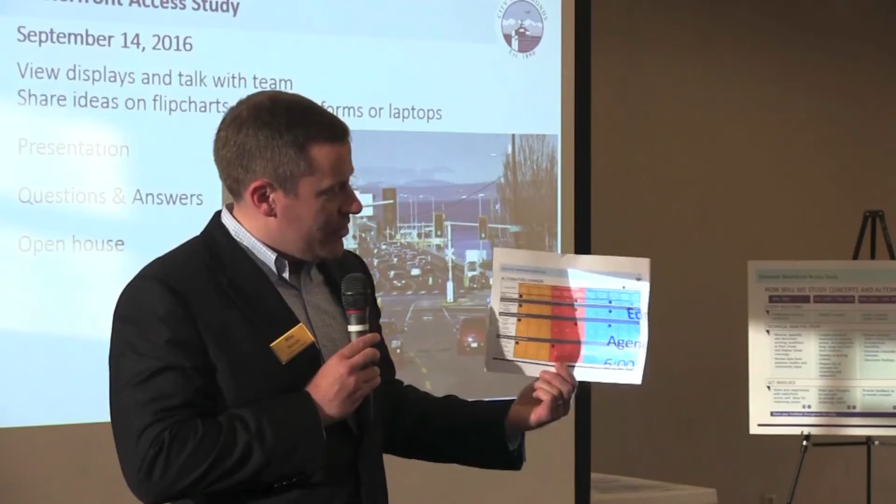Some of you already have this wonderful sheet, but if you walk away with anything tonight, take this with you and look at it. It's a little complicated, we'll walk you through it, but this will let you know where things have bubbled up and scored, and we'd like to know what you think about it. Do you like them? Do they need to be improved? Do you like one more than the other? Is there something we didn't consider? This is the last open public meeting for the task force, so this is a really great opportunity to have an impact before we make a recommendation to the mayor. With that, I'll turn it over to Rick.

Thank you. Thank you, Mike.

As Mike mentioned, this is the fourth meeting, and we have found the input from the prior three meetings very instructive. We've had a lot of participation between those who have attended in person, as well as those who have visited the site online. We've gotten a lot of nice comments out of it. I don't think we've had any real scolding comments, it's all been very, very constructive. So we're looking forward to more of that tonight.

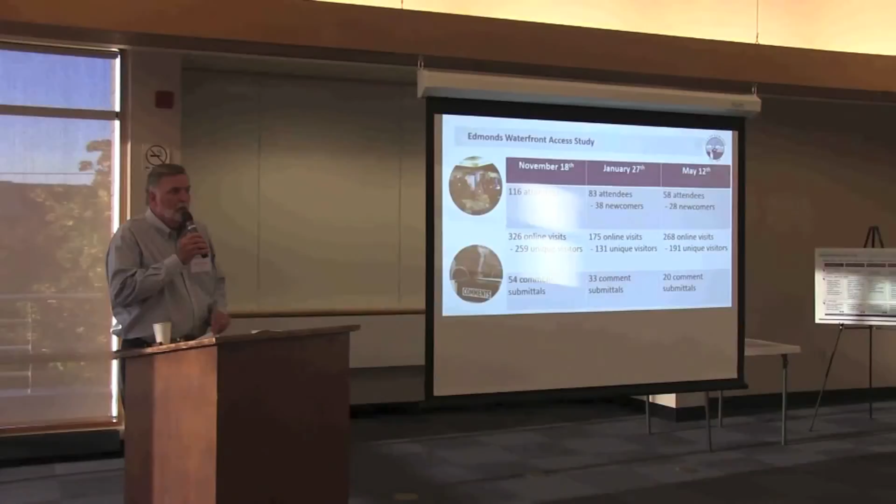So how this is going to work: we'll talk here for a little while, we'll have a question and answer session afterwards, and then you're free to look at things in greater detail, the displays, talk to me, talk to other project staff and the task force, and we'll learn something from you all.

As I mentioned, we've been through a bit of a process. This is our 4th meeting, but we've taken a number of ideas gathered from our team, from prior studies, from the community. We've screened through those in what we call level 1, and from there developed a series of alternatives. We've just gone through the detailed evaluation of those alternatives.

We want to have another meeting here with you all before the task force starts to formulate the recommendation. I want to emphasize, they very specifically decided we're not going to make a provisional recommendation. We want to air this out one more time before we go forward on this, so the iron's hot to strike.

So this is from early days. These are the myriad alternatives or solution concepts that were forwarded in level 1, that we went through and evaluated using a conceptual set of criteria, or qualitative set of criteria.

The idea is to come up with near-term and long-term solutions to address the 4 major needs set forth for this study: improving reliable emergency response access, providing for emergency evacuation of the waterfront when needed, reducing delays to the loading and unloading of ferries, and improving circulation and reducing delays and conflicts for all modes of transportation near the railroad crossings.

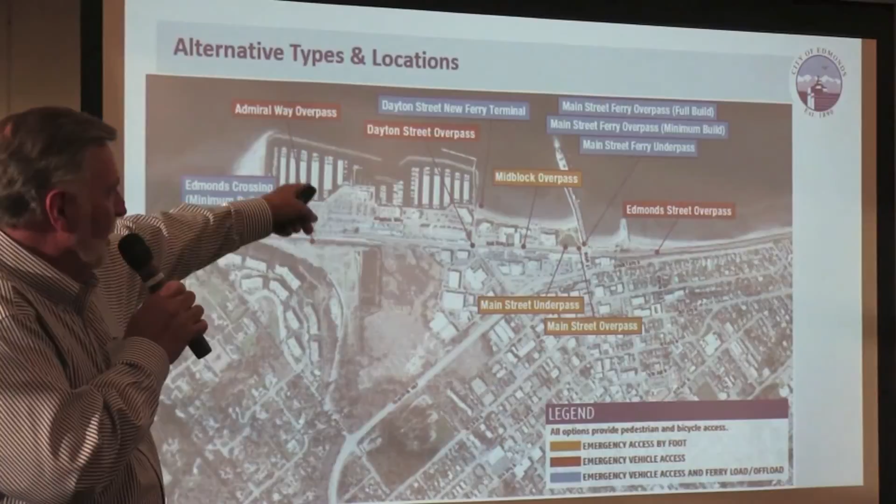We have things like the Edmonds Crossing. Those of you who have been here a while are aware of that. This is a scaled down version of it, but it would basically load cars and store cars over at the Unocal site and take them over to a new ferry dock sticking out basically off the south end of the marina. The Dayton Street New Ferry Terminal would build a garage in the Harbor Square area, and that would queue vehicles, and then they would go over a trestle to the north of the fishing pier, and that would be a new terminal as well.

And then we have 3 alternatives that would modify the existing ferry terminal: one is an underpass, and then 2 different scales of overpasses. Again, there are details on each of these, with a list of the major pluses and minuses as we've identified them in the evaluation.

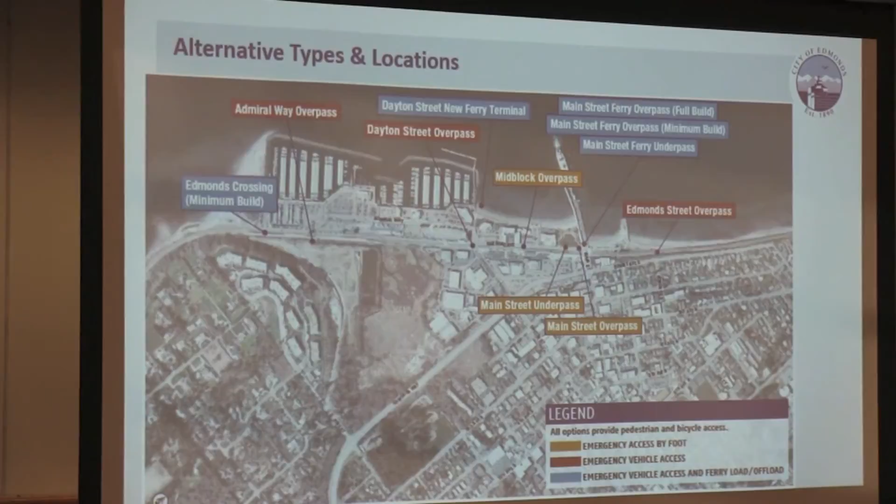In the evaluation, we had 11 criteria that were developed, and we discussed this at our last meeting in different areas. Some of these have up to 9 subparts. The task force has gone through and evaluated each of the alternatives using these criteria, given them a score, and documented the reasoning behind it.

Copies of those are available to view in the room here afterwards—we have notebooks with those. This is kind of the result of it all right now, as it stands, where we're at. We applied a numerical ranking for each of these criteria, 0 through 5: 0 if it's fatally flawed, 5 if it does a great job of enhancing the functionality or benefit.

Using those 11 criteria, not all evenly weighted the same, we've got check marks here identifying which ones came out as highest rated among the different types of alternatives. So what we have is the mid-block overpass came out as the best rated alternative among the pedestrian overpasses. For emergency vehicle access, the Edmonds Street overpass came out with the best score.

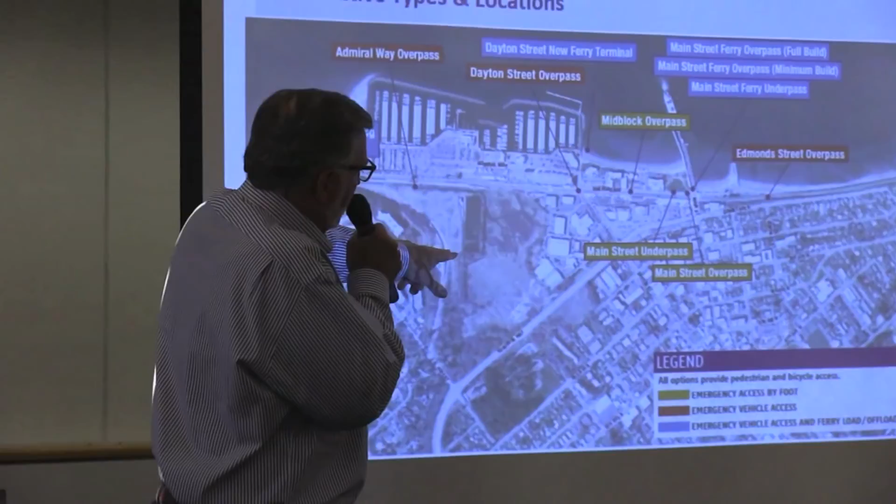Okay, let's start with the first one, on the emergency access for Edmonds Crossing. The Admiral Way overpass is one of those single lane vehicle options. It would come from the Unocal property, it would climb, cross over the alignment for the realignment of Willow Creek, go over the railroad tracks, and land down here in the port property. That would be the single lane emergency vehicle access, also open for pedestrians and bicycles, making a nice loop within our trail system here in Edmonds.

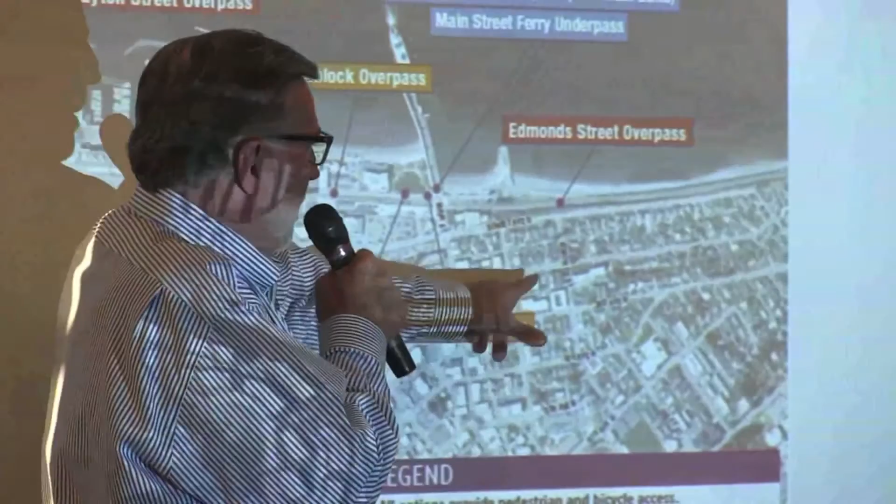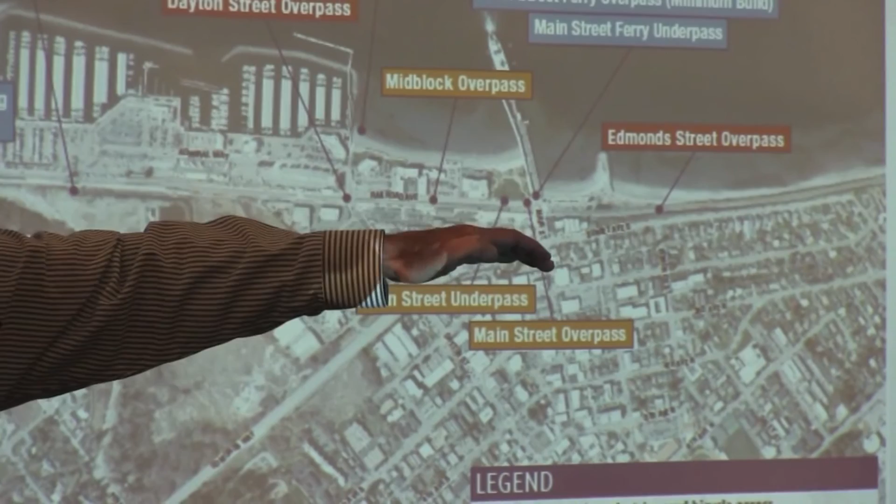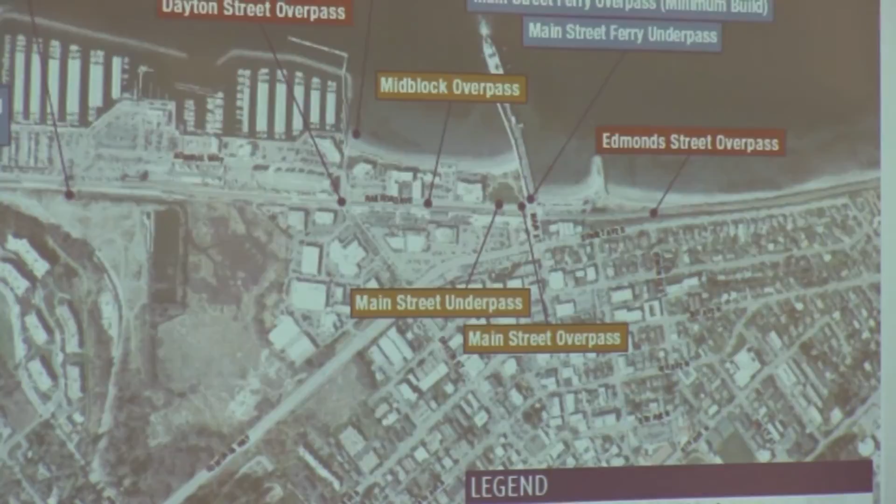Your second question was on projected growth of rail traffic. How often in 10 years, in 20 years, is the at-grade access going to be blocked? I think at our last meeting I presented some statistics on closure times and the number of closures we have on average. We actually found some 24/7 videotape footage. Yes, that's how old I am.

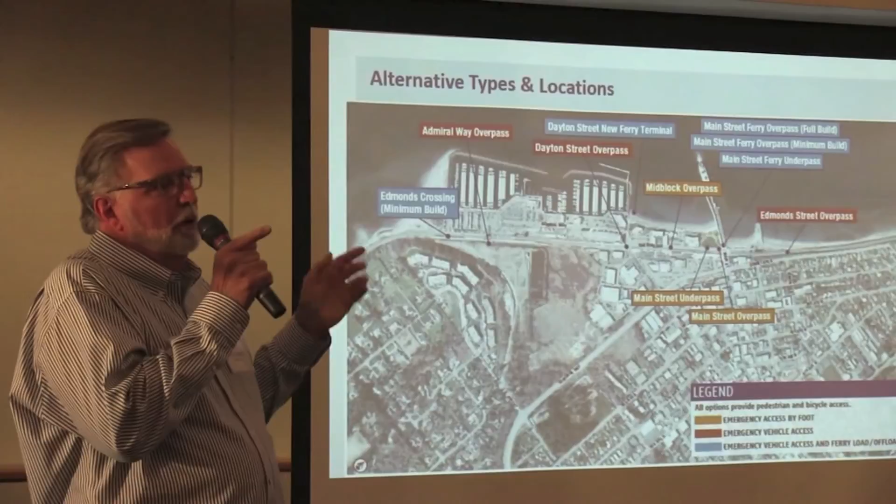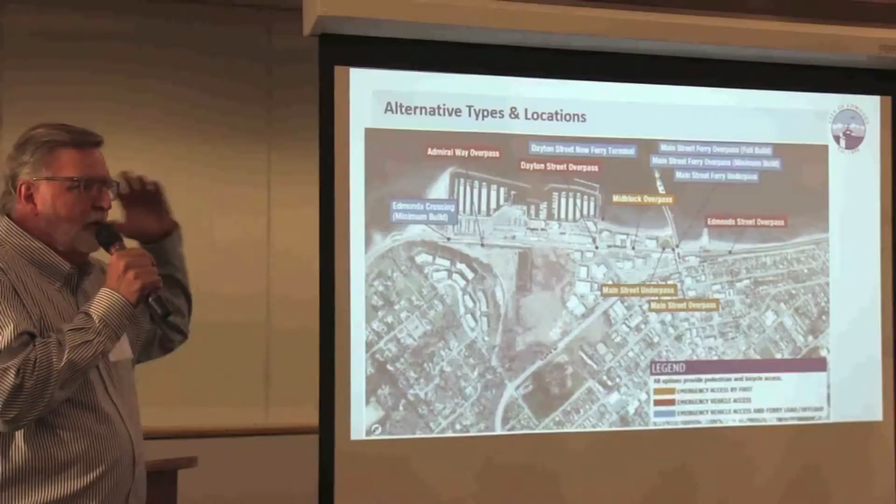Videotape of the Main Street crossing for half a month, late June and early July in 2012. Now, that's when traffic was down, but we were seeing I think it was like 40 trains a day at these crossings. We totaled up the time, looked at how many cars were delayed, how many pedestrians were delayed, and totaled that all up in vehicle hours and pedestrian hours per day. I don't have those numbers right on the tip of my tongue, I've got a lot of extraneous data in my head, but it was pretty surprising what we saw.

Now, as far as growth in delays, the studies we've been able to find show projections that run between 50 to 100% growth in train traffic in the next 15 years or so. That's a lot more trains, a lot more closures, a lot more interrupted ferry loadings. And that does not reflect what's going to go on with oil or coal, because it's such a volatile market you don't want to try and project that. This is just looking at grain, merchandise, materials of all sorts - that's the growth the railroad industry is projecting. Between the railroad industry and the maritime associations in the North Coast area, that's what we're looking at, irrespective of any fossil fuel.

So that's why we talk about, let's think about tomorrow's problem, not just today's or yesterday's.

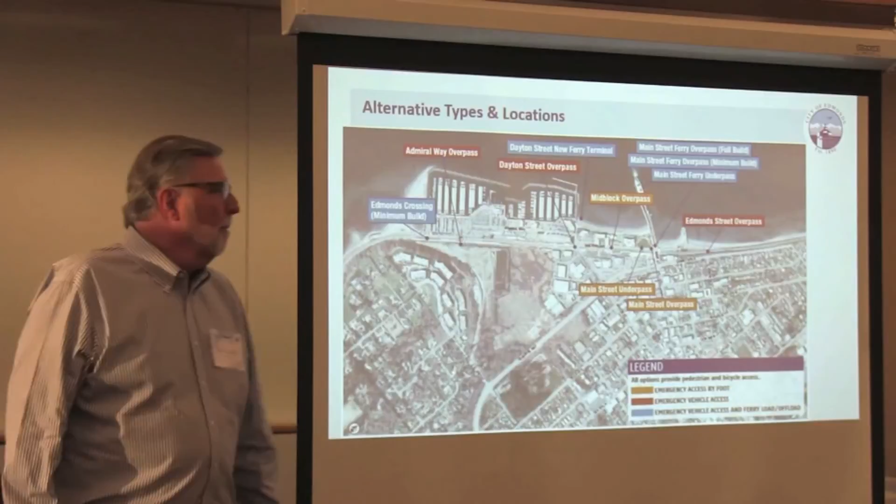Yes, right here. There's just a little bit of a terminology conflict between Edmonds Street Overpass and Edmonds Crossing. It seems like you could change the title of one or the other so you're not duplicating. I don't mentally know which one you're talking about. Could you change the titles of those two alternatives, Edmonds Crossing and Edmonds Street Overpass? I suppose we could. Edmonds Crossing has an identity because there was a project proposed to relocate things - that's why I said anybody who's been here a while would understand it. It went through the whole environmental review process, and then the economy decided to take a vacation.

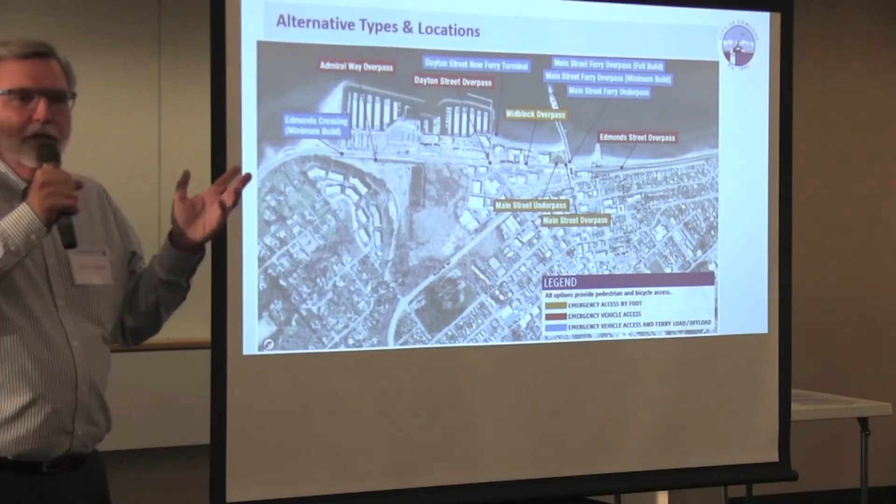State budgets got cut back, and then, as I recall - we have ferry people here - all of a sudden we had 4 Steel Electric class boats we had to replace. So budgets were strained and nothing was going to happen for a while. Now the state is going to embark upon long-term planning.

And this gets into another aspect of what the task force is probably going to be considering as they put together a recommendation, and that is the timelines for these things. The state is going to be reviewing their long-term plan, and they're going to use the information from what we've come up with here to inform that in part. But they're looking at their entire ferry system, figuring out what their priorities are and how things are going to age and what they're going to have to take care of. So this will be feedback to that.

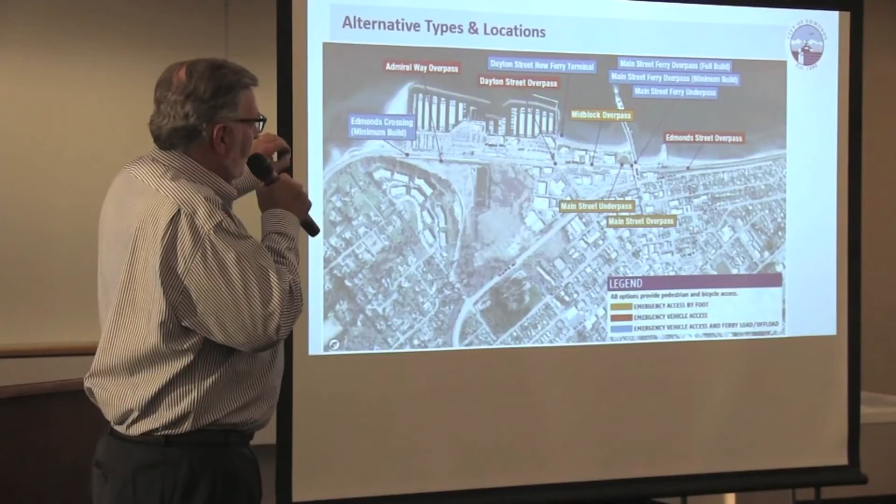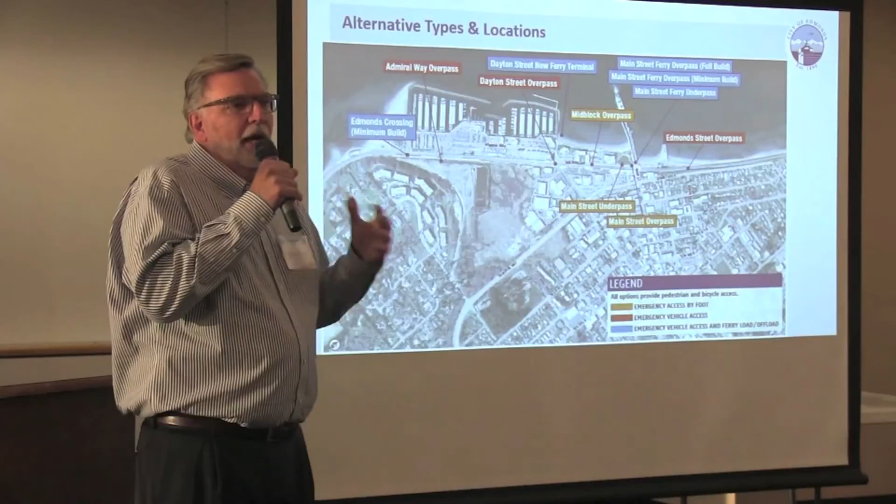But that's a process that really has to be run by ferries. So the question is, until that can all happen—and by the time you deliver it, we're talking a couple decades till something happens—what are we going to do in the meantime? So what the task force is probably going to look at is a phased set of solutions: what do we do immediately, what do we do in the next 5 years, and then what might we do in the longer term. The idea is you want to put together a plan where you're not building throwaways, but building components of an integrated system.

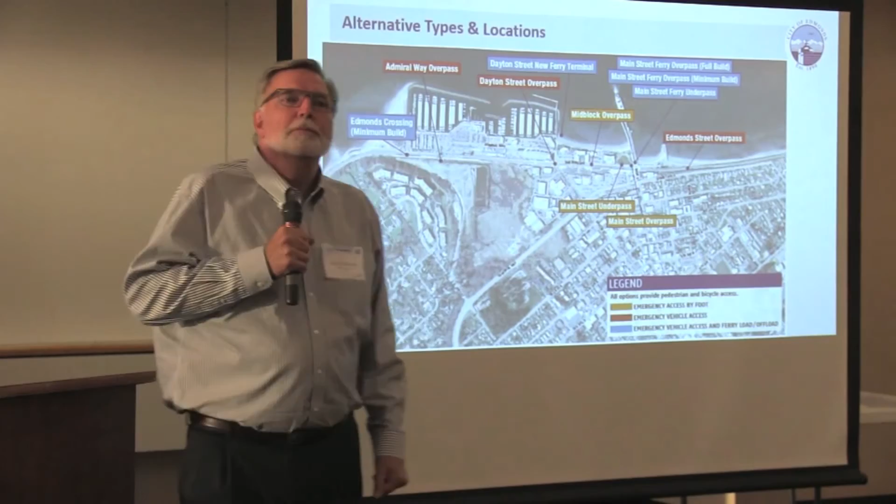Yes, right here. What's your time frame to come up with your recommendation and transmit it on to the mayor? Just to repeat it, the question is the time frame for task force recommendations, and to pass those on to the mayor.

I'm not going to rush the task force, but now we're getting into a deliberative process of trying to formulate this. I could anticipate—looking at them in the face—this could take 2-3 meetings, and we meet about 2 meetings a month. So this could be going on for a little bit, and then we present that to the mayor. We're looking to get this done soon, but I'm not going to force them to, after all the work they've put into it—I don't want to shortchange them on time.

Bill? I was just going to add, we had initially tentatively put this on the council's agenda on October 11th. That's not going to happen—we talked about that this morning. That's clearly too fast. We talked to the mayor about it, and he's going to take some time. Of course, after the task force makes recommendations to him, he's got to go through his own process as well, looking at what the task force has suggested, and then come up with his package to take to the council. So you're really looking into November, easily.

Thank you. Could you give us any idea about funding as well as cost of the alternatives? Okay, the question is any costs or funding related to the alternatives. Yes, as you can imagine, these things have quite a range of costs. Let me just summarize the ranges of those—I meant to do that, but I stopped looking at my notes while giving the presentation.

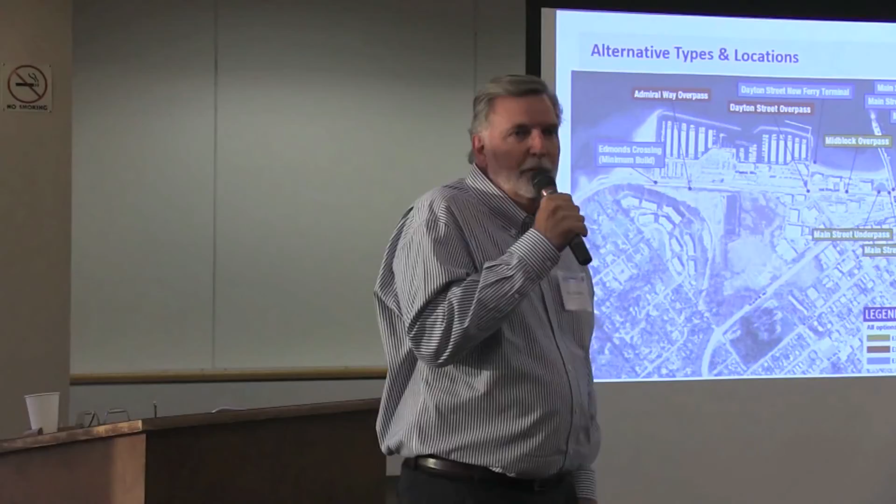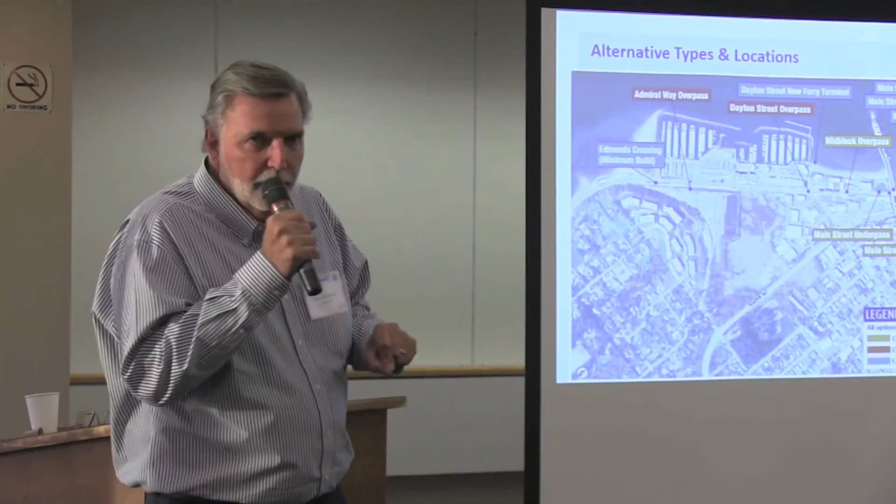As far as funding sources, we also looked at the types of projects and how they might be eligible for different sources of funding. We've gone through quite a look at all that, and that's part of the question—you're right to bring it up—because whether something's affordable is a factor of both the cost and what kind of sources you may have to pay for it. Some projects would be attractive to certain grant sources; others we really wouldn't know until we get down the road a ways. Some of these grant sources like to be the last money into the pot, so that can be a little tricky at times.

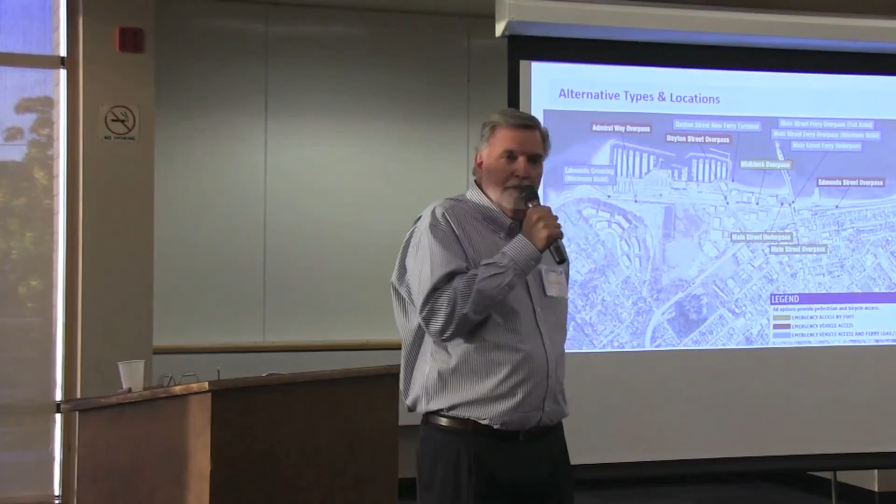Do you have a question? You had your hand up a couple times, so I want to make sure. It was kind of related to that—I guess it seems like to some extent you're going to have to take into account what the state ferry system is, rebuild the terminal. Just wondering how you're going to factor that in. So a question might be how to factor in state ferry priorities in these alternatives.

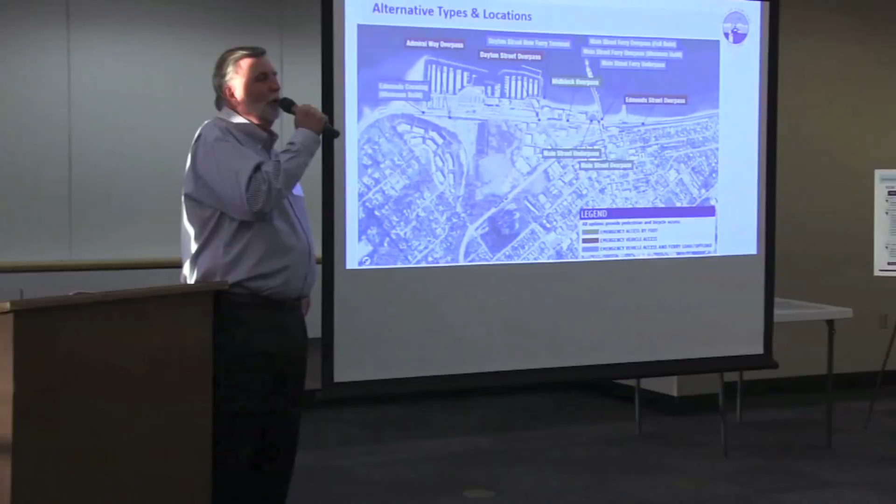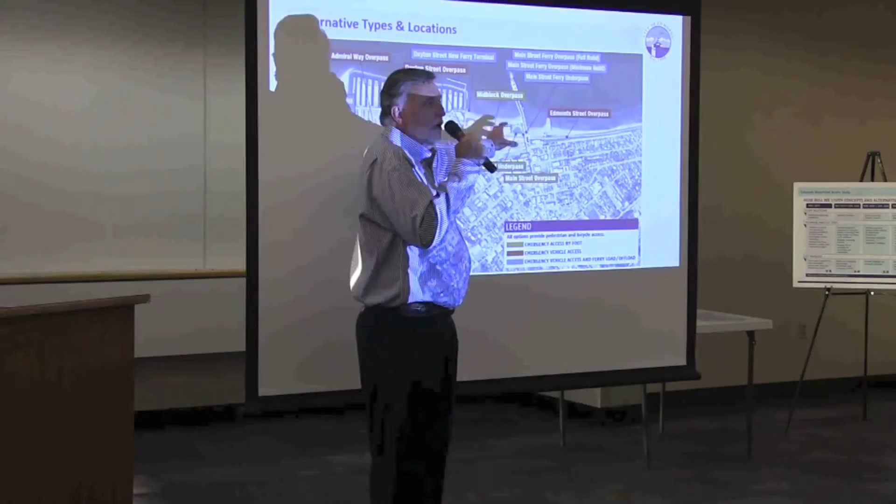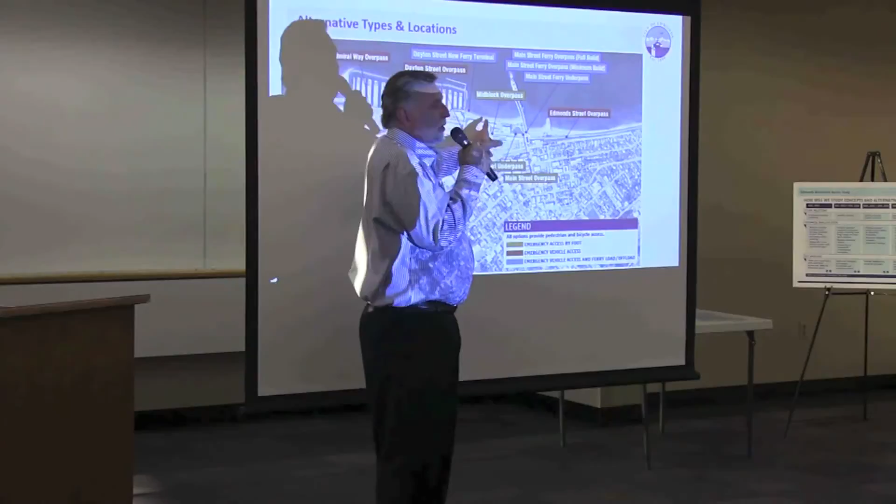Well, you're right on point there. So when we've looked at some of these pedestrian overpasses, we've looked at them in the vicinity of Main Street, of the existing terminal, because that's going to serve Sounder, community transit, and ferry, as well as pedestrians coming off the ferry or getting off the train on the new west track, because they're going to second-track it someday, and get over and make their way to downtown or elsewhere. So when you're looking at building an overpass that connects from the passenger walk-off, you just carry it on over, but you try to steer that clear or offset it from where you might be doing future construction, or you design it so it's modular, so it can be taken out and reused in the new design.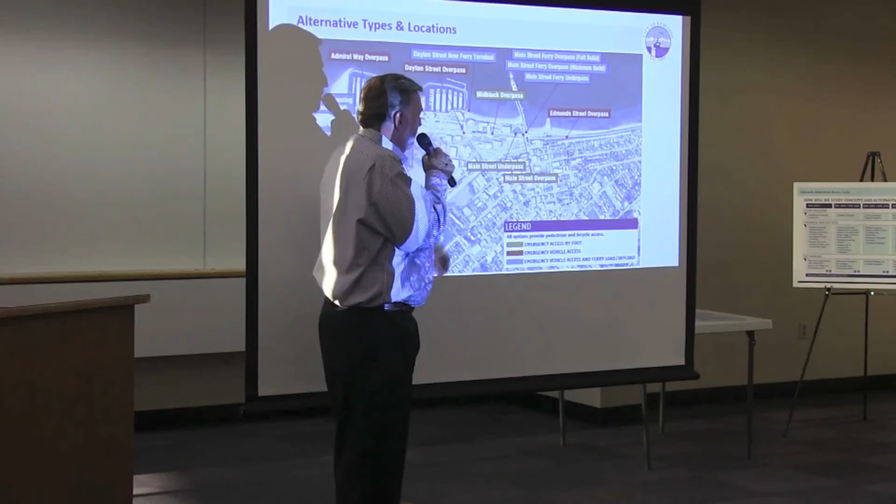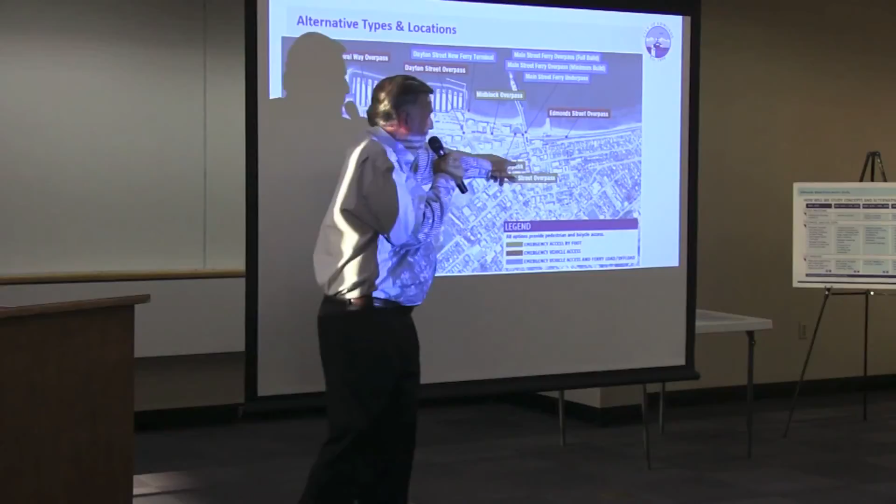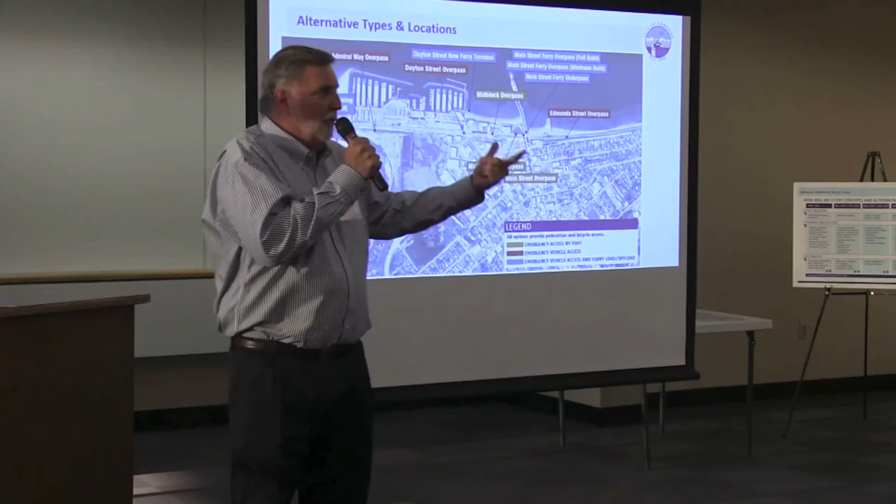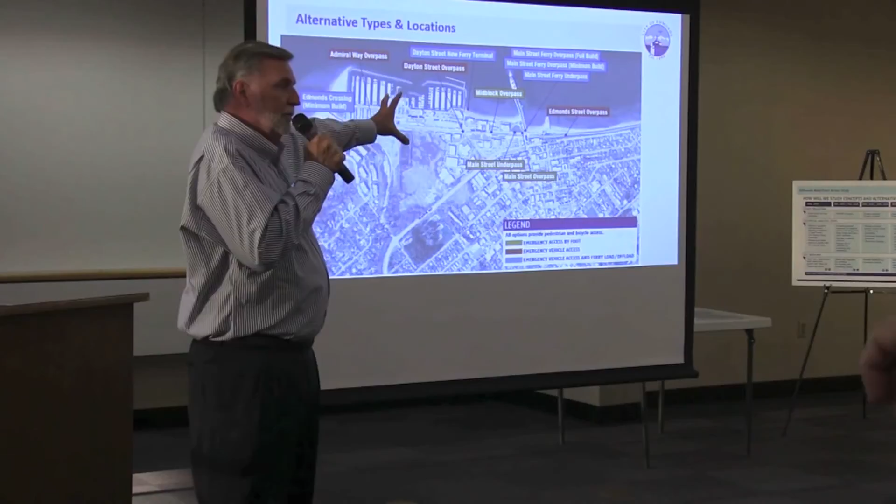The mid-block overpass is associated with the train station and those platforms. The other thing you look at is if you're going to move things down this way, then perhaps what you've just created is a nice loop system that has some other value with the city. So you start taking it into the overall city landscape and how things function, and you start looking at other opportunities. But there's a little bit hanging out there until the ferries make a decision as to which way they're going to go, and right now there are other priorities for the ferries. We understand this.

Yes, in the back. So what do you anticipate your preferred alternative will look like? Are you going to pick one of the blues, one of the oranges, one of the yellows? Is it going to be just one of those alternatives, or what are you contemplating it'll look like? So the question is, what does the task force recommendation look like? Is it one alternative? Is it a mix? What's anticipated?

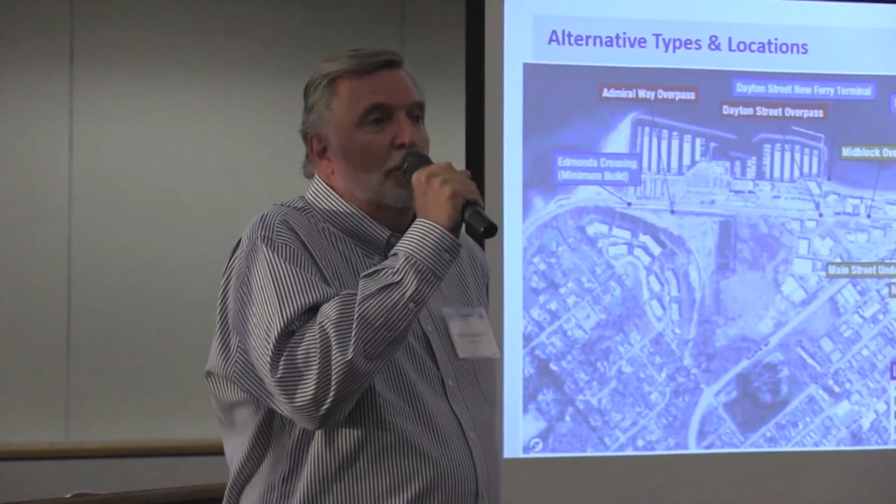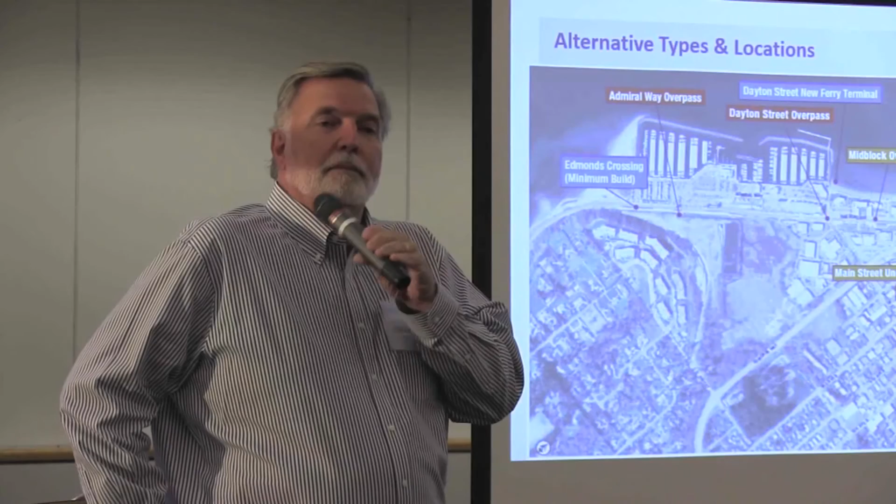Okay, we'll come back to you. Go ahead. I think you touched on it a little bit, but maybe you can give me more details. For a more permanent long-term fix, did they look at both overhead passes for pedestrians and underground passage for vehicles, all vehicles? So is the question for a long-term fix, did you look at overpasses for pedestrians and bikes and underpasses for cars or other vehicles? For all vehicles, yeah. Okay.

We don't have the geometry, we don't have the space to accommodate the geometry of a general service roadway to the other side. We just don't have the room on the water side of the tracks. If the tracks could be relocated, we could get by that. But to allow for intersections that would be at grade after you've gone underneath... I mean, even this underpass for the ferry, we're diving down under the tracks. By the time we come up, we're barely staying within the footprint of the existing pier, the filled pier, and that's running out like 400 feet. So if you try to do that anywhere else here, you're in the water. But yeah, that would be a great solution.

Okay, right here. What is the timeline then for the double track, for the extra track, and how is that going to play into all of this? So the question is, what's the timeline for the proposed new double track, and how does that factor into these alternatives? If I had another quarter, I wouldn't bet on that one because I can't tell what the railroad's going to do.

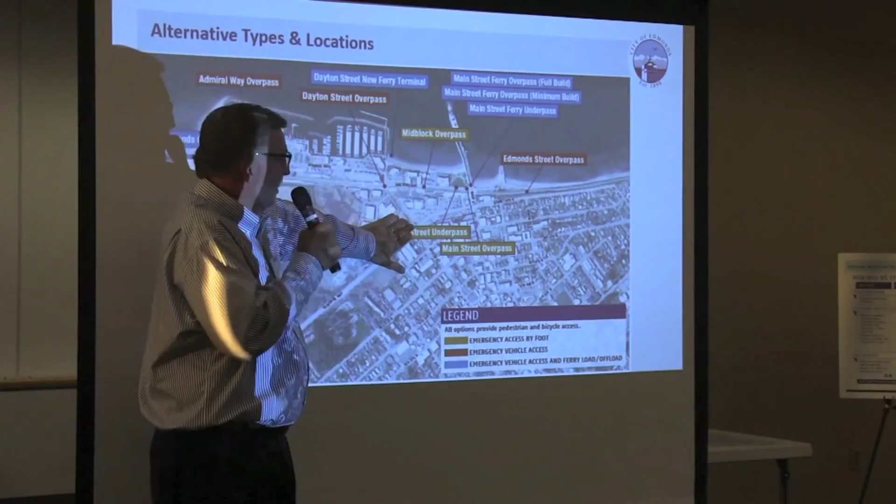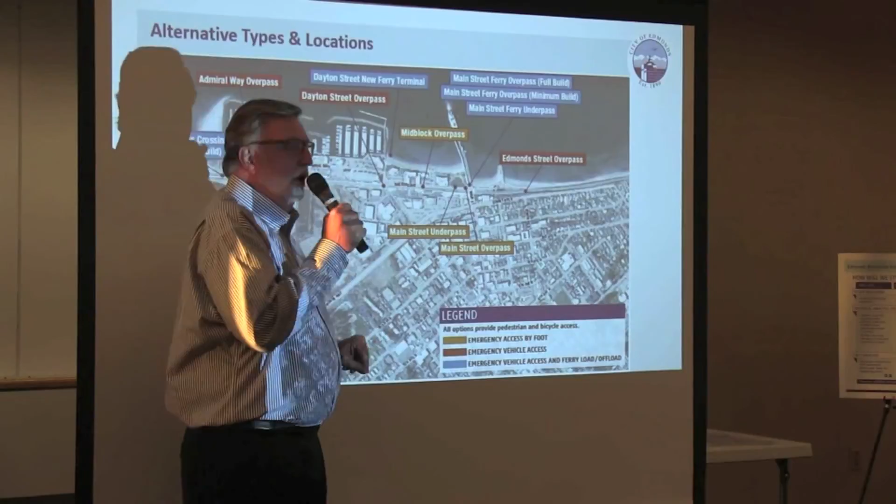Yeah, so I tried to use the same color, but my computer skills are dated. So the front runners in each category: for the pedestrian overpass, it was the mid-block overpass that seemed to rank the highest. That's the pedestrian overpass we have the rendering for, which basically spans from near the train station to near the senior center. As far as emergency vehicle access, the red ones, the Edmonds Street overpass was the highly scored choice of those.

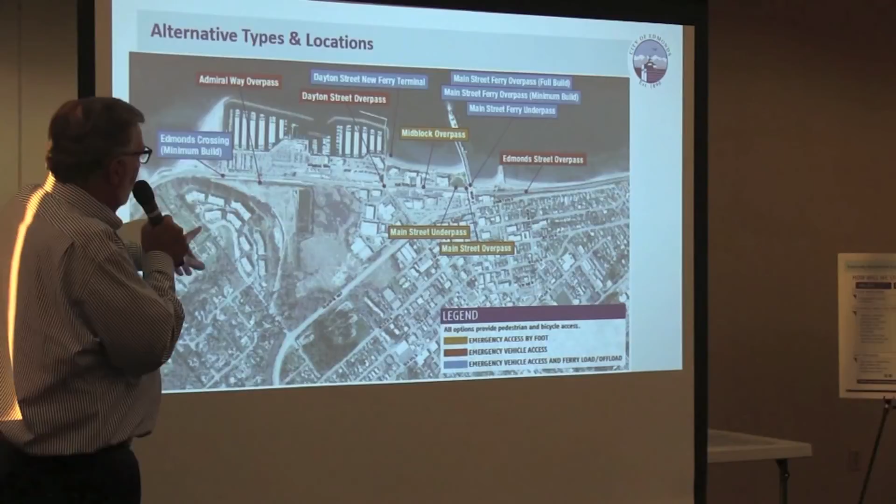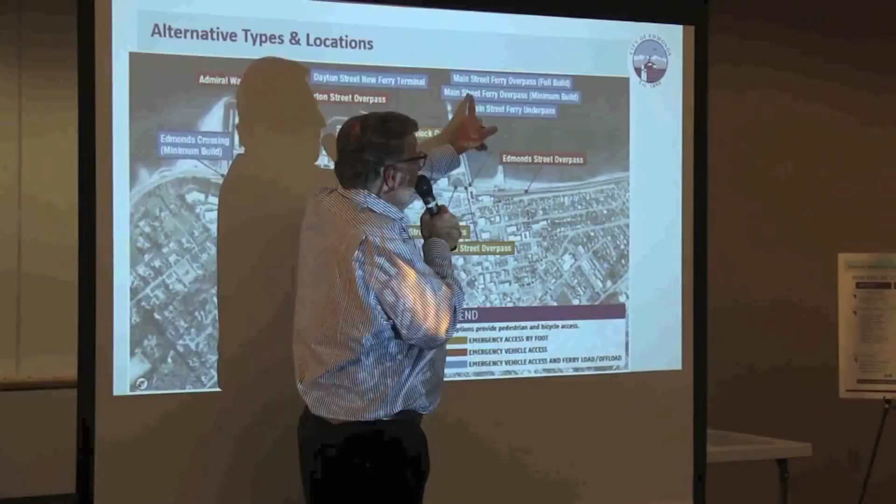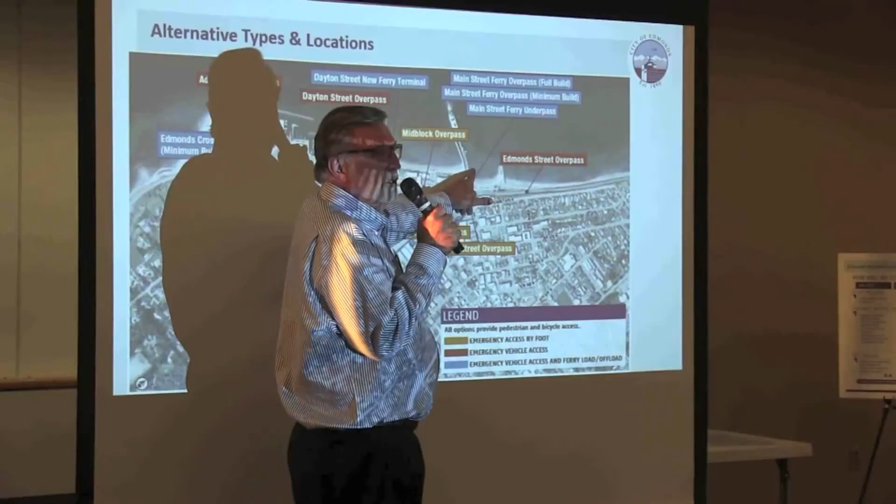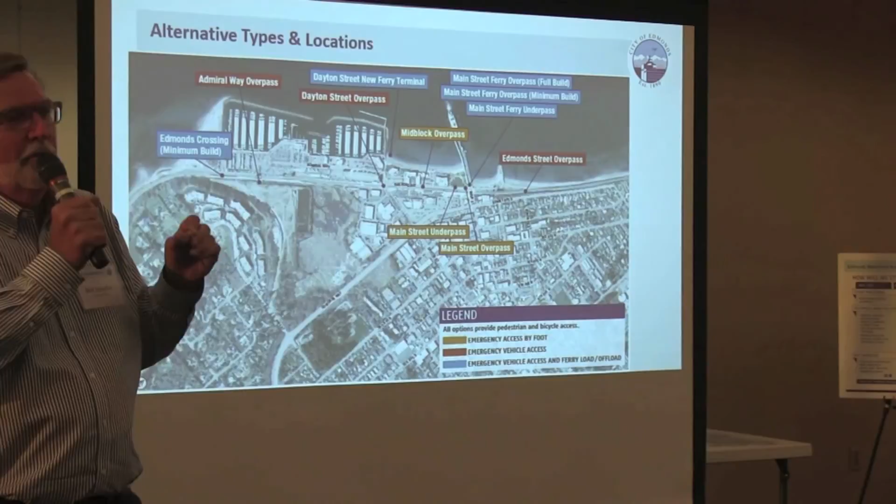And then for the ferry access, it was a tie or back and forth between the minimum build Edmonds Crossing alternative, which would be a new dock outside of the port, and the Main Street ferry overpass minimum build. Basically it's also illustrated there as an overpass starting from the ferry holding lanes over the railroad tracks, dropping down onto the pier. It would have the same vehicle queuing capacity as we have today. And one of the options being considered went over the marsh.

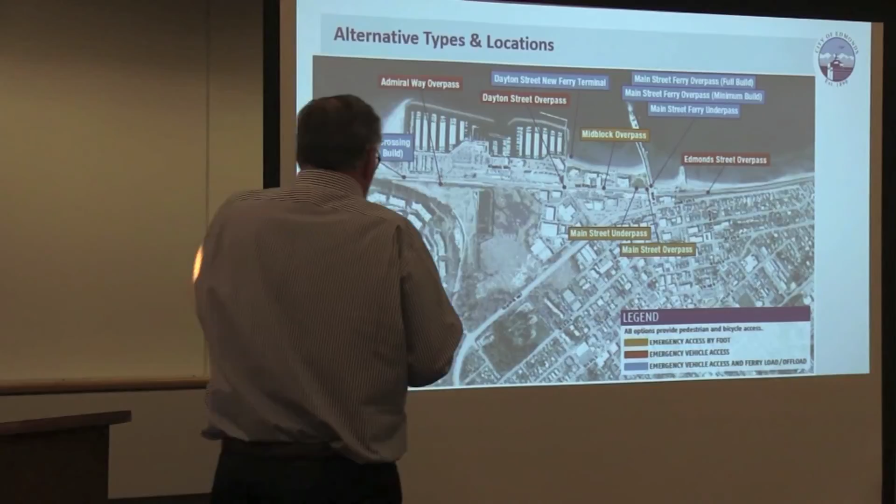Which one by name is that one? Okay, which option by name goes over the marsh—was that a driving overpass? That is the Admiral Way overpass, one of the emergency vehicle routes, a single lane roadway. The alignment would follow the Unocal service road and then elevate and go over Willow Creek and the railroad, dropping down into the park, into these parking areas.

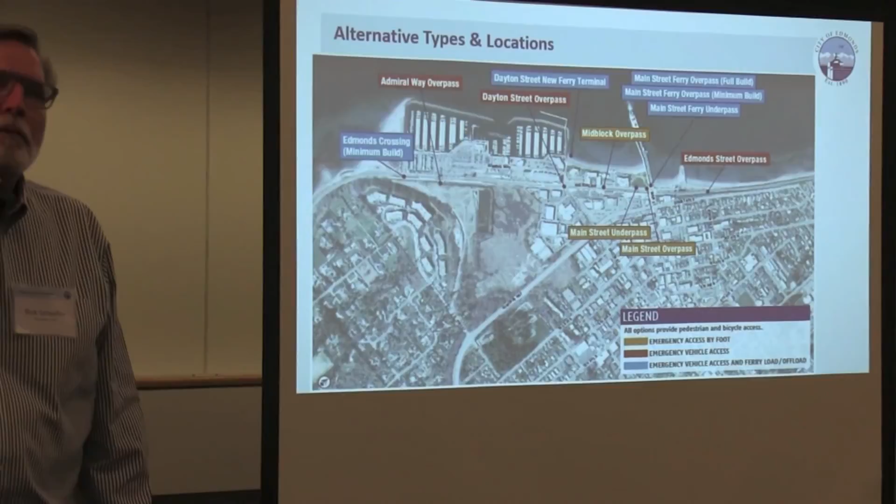You don't have the Edmonds Street overpass as having any ferry offload or onload. Why? Couldn't that accommodate that? So the question is, why does the Edmonds Street overpass alternative not have any ferry accommodations, and could it accommodate that? All 3 of the emergency vehicle overpass alternatives are just single lane roadways, and as such they wouldn't function for routine loading and offloading of the ferries. They just need 2 lanes—they need to be able to empty the boats, fill them, get them turned around and on their way.

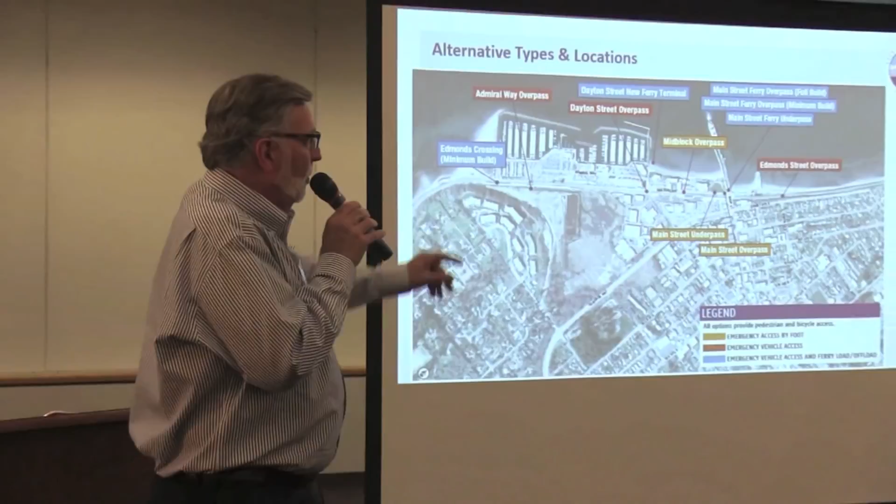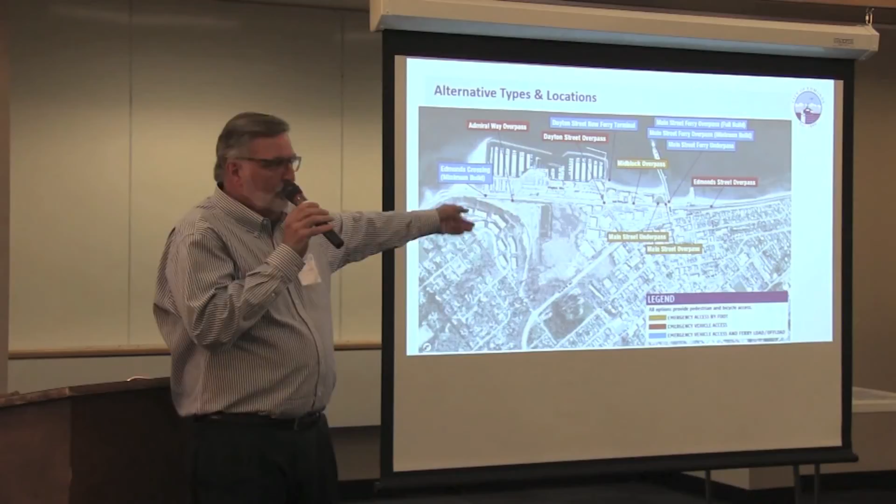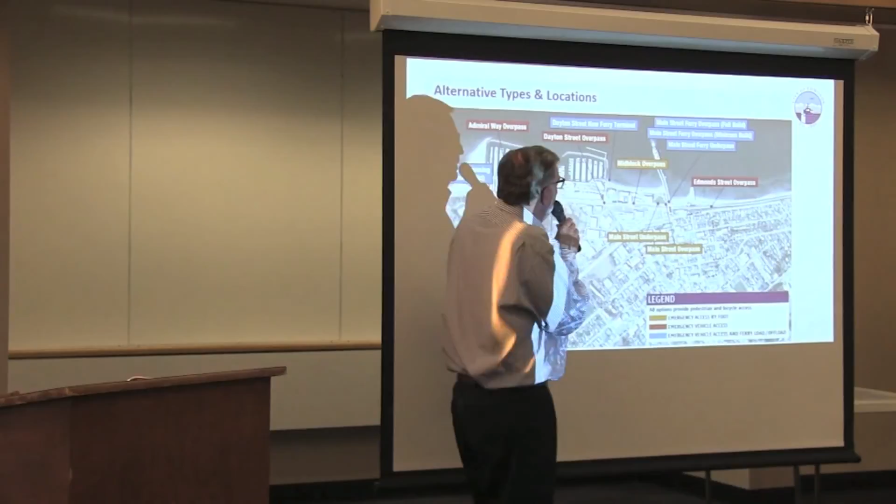Also, the street system's not right now configured for those kinds of large movements. The idea is they would be available in one of these extended emergencies, which we've had three of since we started this study—extended delays when the trains have blocked both Main and Dayton. So if that's the case and you got a loaded ferry boat there, at least with proper traffic control you could take cars off one at a time. Trucks probably would have to stay on the dock until the situation's resolved. That's a feature of all three alternatives—you could do emergency offloading. You could do it pretty readily here on Edmonds Street, bring it down to Dayton and over that way, or even come all the way down and take it over this route in an emergency.

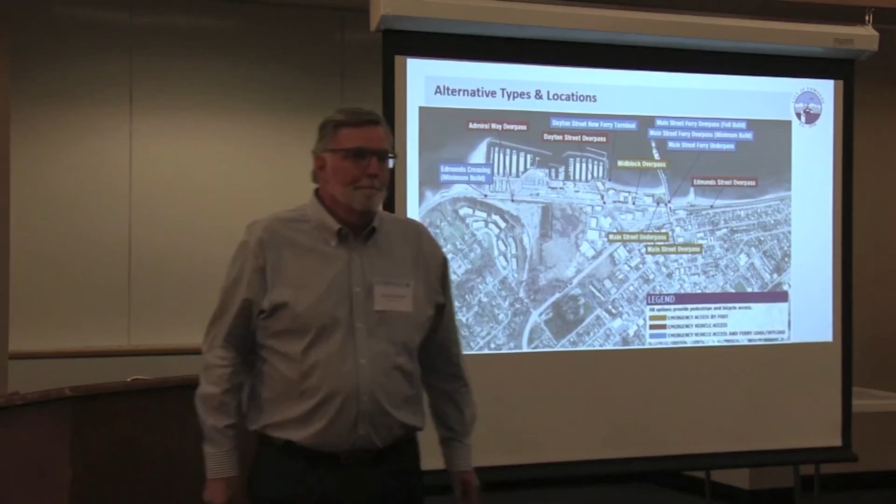Okay, yes. Then we'll do two more questions, then we'll break. If you did nothing, do the Washington State ferries want to relocate their dock?

So is the question, if no alternatives were built, would ferries still want to relocate the dock from its current location? As was mentioned earlier, back in 2007 funding for the ferry system was reduced by the legislature. So right now what we're focusing on, of the 20 ferry terminals we have across Puget Sound, over the next 16 years, are the highest priority. And what I can tell you—while I personally like Edmonds Crossing—the Edmonds Ferry Terminal is in a good state right now as it stands, with overhead loading fairly recent, and it's not within our 16-year plan to move the ferry terminal.

Yes, and we'll do one more, and we'll get to you. What is the projected increase in the number of ferries anticipated over the next 20 years? Can I ask a clarifying question—do you mean specifically for Edmonds? Yeah, with this location. Okay, so the question is what's the projected increase in ferries over the next 20 years. So we have no projected increase in the number of ferries that will be servicing Edmonds-Kingston over the next 20 years.

So you think the capacity is sufficient to handle the traffic? I didn't say that. Yeah, I know, I just think so. So as our funding is... oh excuse me, the follow-up comment was, does that mean there's any increase in capacity in the next 20 years? Well, no, I think the traffic's going to continue to increase. So if you don't increase the number of ferries, we're going to have big lines at either end. That's right. So currently we have 50-plus-year-old ferries that we're trying to replace. We've been operating, as was mentioned, the steel electrics that were in their 80s. So I don't know if you can imagine driving an 80-year-old vehicle 22 hours a day, every day, seven days a week—it's hard on them. So we're trying to get the funding just to replace what we have today, the capacity, let alone a huge funding package to increase capacity.

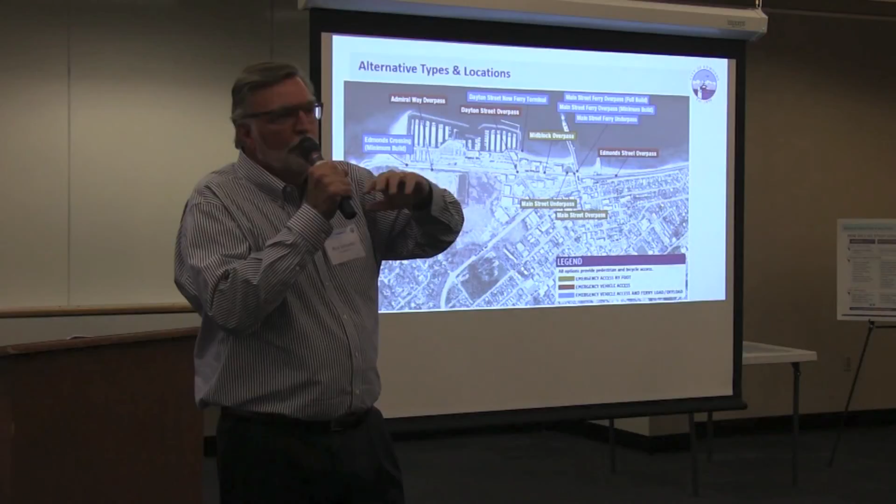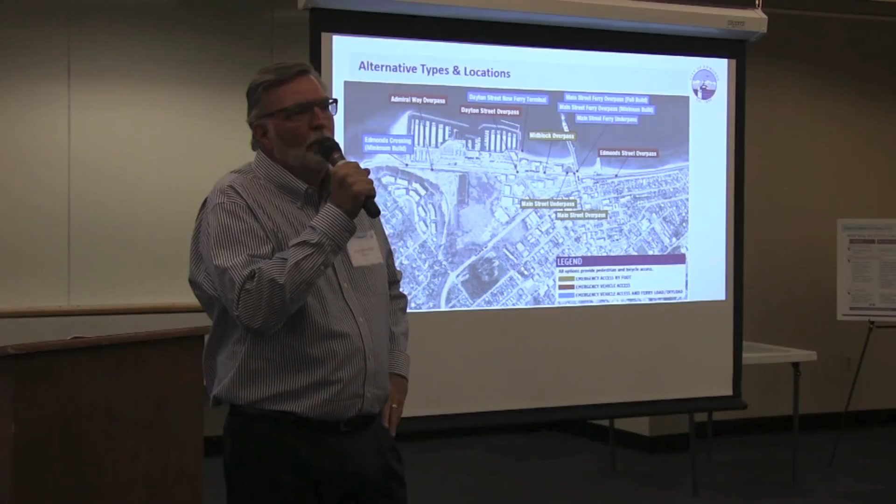Okay, this will be our last question, and we'll break for open house. Just on your final recommendations, will it include an environmental analysis? Will the final task force recommendations include environmental analysis? That would be the next stage. What we have done in preparing this analysis is looking ahead to that. We've prepared an existing conditions report that should form the basis for much of an environmental review, as a base case. But that would be another step. The next step, actually, in such a process of implementing a project, is to go through environmental review and do the formal decision making there.

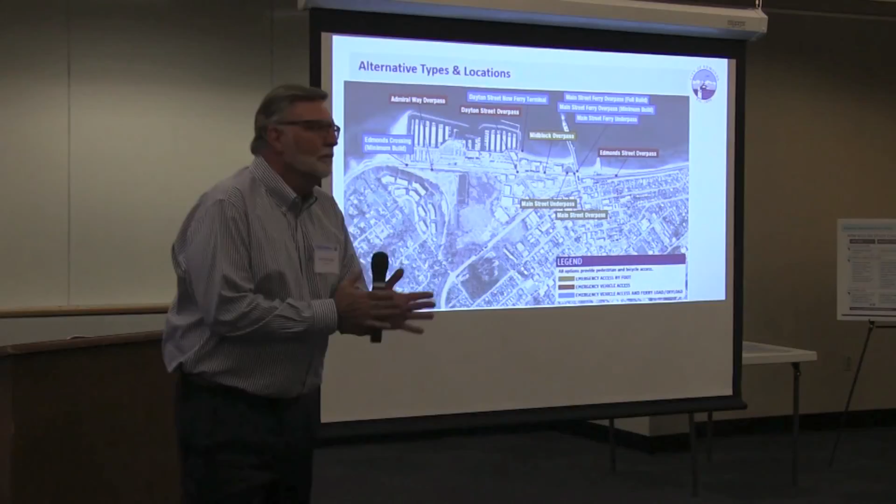Okay, thank you all for your questions and your attention. All of the alternatives are in specific detail in the back. I think many of you had a chance to see that at the beginning of the meeting. They're all grouped by the three various alternative groupings that are on the map and on your handout, so they're grouped together so you can compare them that way. Thank you.